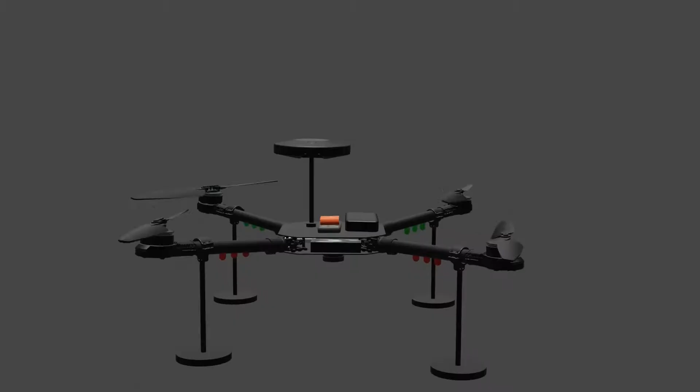The team timeline. A formulated and comprehensive flight plan must be executed meticulously during simulated full mission flights. The system must be modularized and designed to a plug-and-play standard. The team efficiently manages the entire system by utilizing GCS software to upload the waypoint course and search grid into the autopilot via a 915 MHz telemetry link. Once preparations are complete, the mission can be initiated with a simple command to arm and begin.

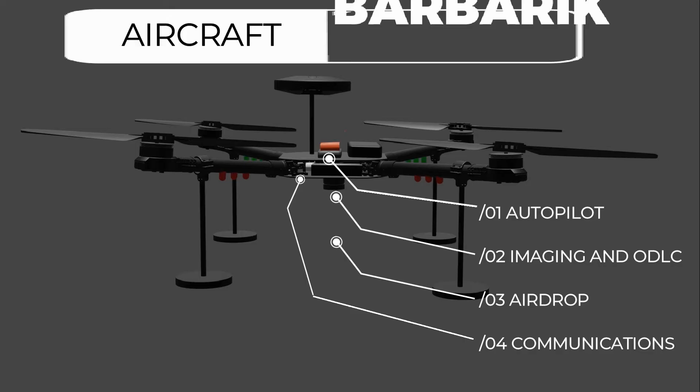Throughout the mission, the UAV autonomously navigates the designated waypoint course, and when it reaches the search grid, the manual UI operator can access the camera images in real time. These images are promptly analyzed, and any targets identified are designated for the payload delivery. Once a target has been identified, the airdrop system is triggered to release the payload, which is safely and accurately delivered to the target location with minimal delay.

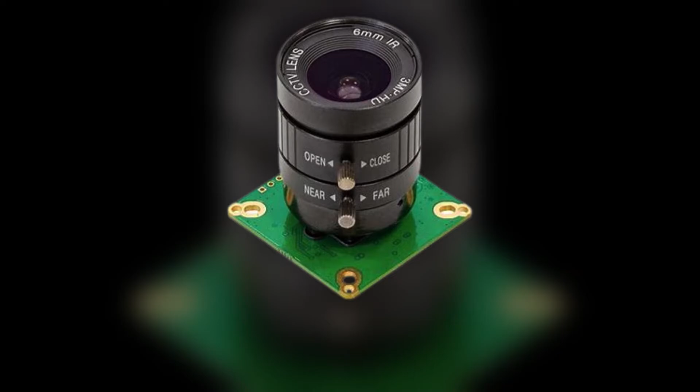This process is repeated for each of the 5 designated targets, after which the UAV returns to its point of origin and lands safely. This year, for imaging, an ArduCam HQ camera featuring a Sony IMX477 sensor is being used, along with a 6mm lens. The combination of these features provides the system with images with target pixel dimensions of 81x58 pixels, which provides sufficient clarity to classify each target and enables effective object detection, localization, and classification.

A manual UI system is developed incorporating the Jetson Nano as the onboard computer and a Ubiquiti Bullet M5 and PowerBeam M5 for reliable data transmission from the drone to the ground control station. The buttons have key bindings to improve usability. When the operator selects an object, they can stop and reposition the drone based on the object's calculated location using pixel coordinates of the target in the image. Accounting for various lighting conditions and backgrounds, ideal values for speed of drone, FPS, exposure, ISO, and shutter speed were chosen.

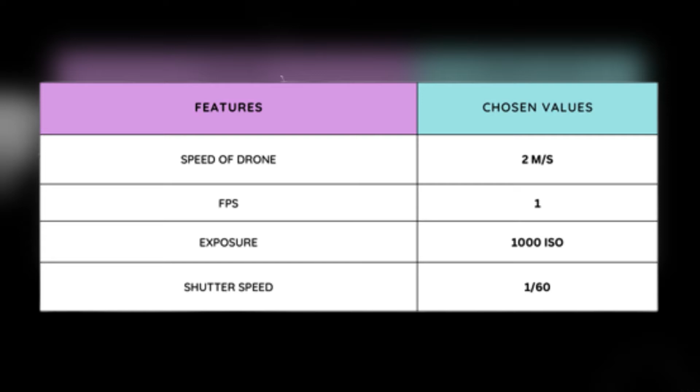The payload, consisting of a water bottle, has been wrapped in a layer of foam to minimize any potential damage. Additionally, the bottle can be easily removed by the judges without the need for any tools. The mechanism operates on a straightforward yet effective stop and release principle. By repeatedly stopping and releasing a free-falling bottle, the mechanism ensures that the bottle maintains a controlled descent and never gains excessive speed before landing. The implementation for the mechanism is done with a pulley which can freely rotate using ball bearings.

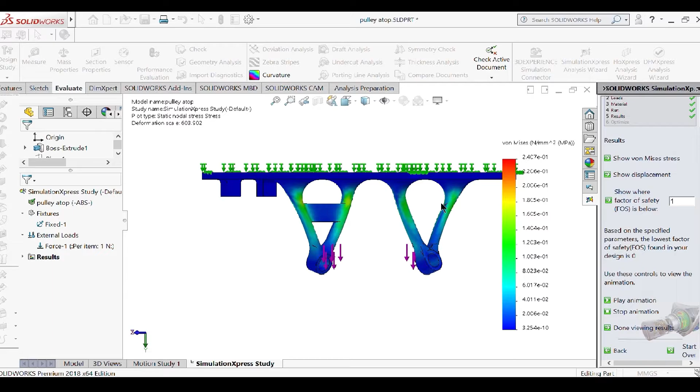The payload housing consists of a plate with two 15-degree tapered extruded cuts that meet at a 60-degree angle. A thick guide for the locking rod is placed on one side of these extrusions. A C++ program is loaded onto an Arduino Nano microcontroller to facilitate the lock-unlock mechanism upon receiving the trigger to drop. Each lock and unlock action is derived from a mathematical function that controls the payload's descent speed. The program enables the payload to drop faster at higher altitudes and gradually slows it down as it approaches the ground without requiring manual intervention.

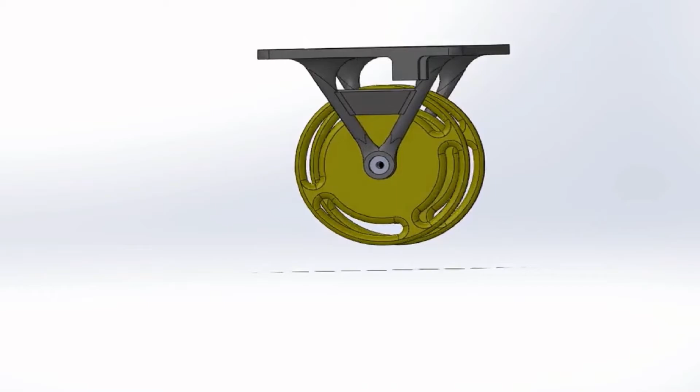The optimal drop time is calculated based on the definition of the mathematical function, which uses delays with millisecond accuracy to choose when to stop and release. After careful consideration of factors such as flight time spent on waiting for drop and safety of the payload, the function has been expertly calibrated to achieve a total drop time of 12 seconds from an altitude of 100 feet.

This level of precision ensures the payload is delivered safely and efficiently. 3 different types of communication systems have been implemented for the communication of the UAS with the GCS. The ground control station is connected to the autopilot via a 915 MHz RFD 900X which sends data using the MAVLink 2 protocol. This provides security encryption and low bandwidth transmission.

Manual control uses a Radiomaster TX16 transmitter with an FrSky X8R receiver which connects to the autopilot through S-Bus. The transmission takes place at 2.4 GHz using the FrSky D16FR protocol. Manual control inputs are sent and the battery voltages are obtained on the transmitter screen for redundancy using the smart port of the receiver.

Ubiquiti PowerBeam and Bullet are used for our communication link for high bandwidth data. These devices act as an Ethernet bridge transmitting data at 5 GHz. It handles imagery data for object detection, localization, and classification, commands to reposition the drone and triggers the drops. Finally, the manual UI operator is connected to the Pixhawk via a serial connection. With the OBC acting as virtual router, there is a TCP connection routed to the operator's laptop.

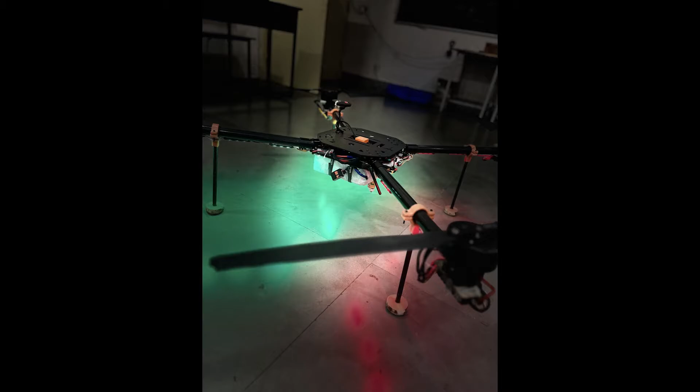The team has designed and built the aircraft, which is tailored specifically for the SUAS competition. The quadcopter is an X configuration with dimensions of 32 x 32 x 20. The frame is constructed entirely of carbon fiber, ensuring optimal durability and strength. The design process involved careful attention to detail, utilizing simulation analysis to precisely route mounting codes.

The frame comprises of 2 plates located at the top and the bottom of the structure, sandwiched by 4 folding mounts for the booms. The motors are attached to specially crafted CNC aluminium mounts situated at the ends of the boom. The propulsion system features top-of-the-line 100 kV motors and a 30-inch propeller system, which gives a maximum thrust of 31 pounds, providing excellent maneuverability and endurance.

To ensure safe and efficient transport of heavy payloads, we have designed a unique landing gear system with non-interference in mind. Specifications of the aircraft are as shown below. Battery capacity 22 ampere-hour, voltage 14S, propeller size 30 inch, ESC 80 amp, motor to motor distance 1170 mm, all-up weight 37.2 pounds.

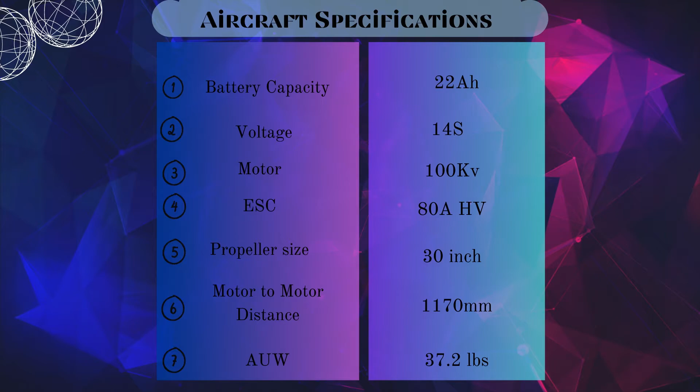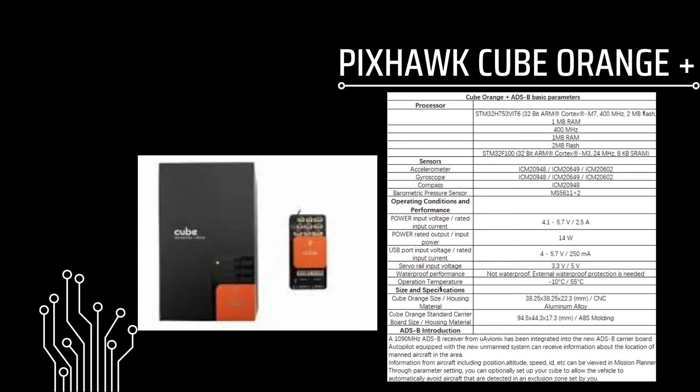The Pixhawk Cube Orange Plus serves as the autopilot for the UAS, featuring advanced capabilities like redundant sensors and multiple communication interfaces for high performance, reliability, and flexibility in UAV applications. ArduCopter, an open-source software suite, is used to control the autopilot.

Tuning is done by applying analytical techniques on flight performance graphs and auto-tuning the flight controller with respect to the frame. This enables easy compliance with competition requirements as the autopilot supports obstacle avoidance algorithms, auto takeoff and landing, and entire waypoint course implementation.

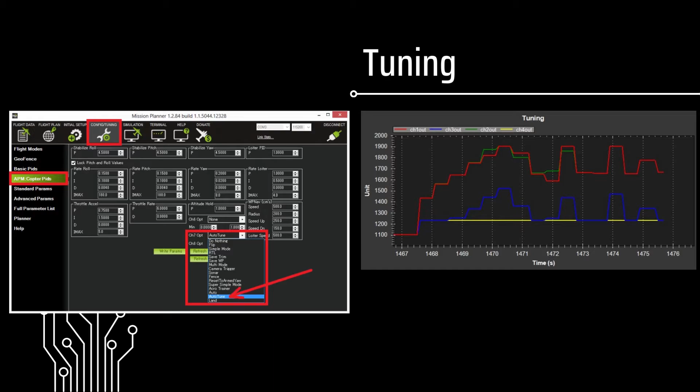As ground control station, the Mission Planner software is a widely respected option that provides professional-grade functionality for mission planning and execution, including advanced flight mission planning, autonomous flight modes, and real-time telemetry and data logging for unmanned aerial vehicles.

Dynamic obstacle avoidance is a crucial aspect of mission planning in order to ensure safe operations and avoid potential collisions with other aircrafts. This is accomplished through the use of unidirectional lidars, which are positioned towards the front and rear of the aircraft to detect obstacles in the flight plan.

To achieve avoidance, the BendyRuler algorithm is utilized on the autopilot system, allowing for dynamic movement away from the detected obstacle while maintaining a safe distance. The BendyRuler algorithm actively scans the surrounding area in various directions in search of open spaces, with the ultimate goal of selecting a direction that is both open and leads towards the final destination.

Under alternatives considered, the table reads as follows: the system, the alternative, and the rationale for discarding. Under aircraft, off-the-shelf frame or commercially available frame was discarded due to lack of design flexibility and higher manufacturing costs. As a power source, lithium-ion battery packs were discarded due to low discharge current rates leading to high voltage sags.

Under airdrop, winch mechanism using brushed low RPM motors was discarded due to its inability to drop within a reasonable amount of time due to mechanically limited maximum speeds. Another airdrop alternative was by using back EMF of brushless DC motor to slow itself down. That was implemented by shorting the cables of the motor with each other. This alternative was also dropped due to inability to make reliable calculations.

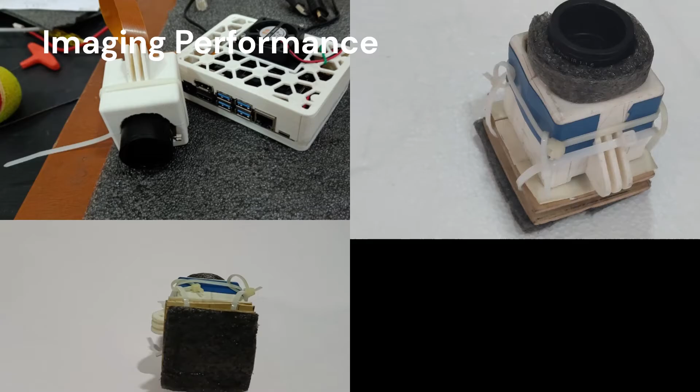A series of tests were conducted to ascertain the reliability of the imagery hardware. Over the past several months, approximately 4,000 images were captured to assess the camera's performance under varying lighting conditions and from different altitudes corresponding to those during the mission. Approximately 2,000 of these images were captured with the hardware mounted on the UAV. Various measures were taken to ensure optimal image quality to prevent undesirable effects such as jello effect and image blur. A vibration dampener mechanism was developed through several rounds of rigorous testing. The average resolution of an object in the images was found to be approximately 80 x 60 pixels, which closely

approximates... The airdrop subsystem underwent rigorous testing to identify potential points of failure, including sudden stops causing jerks and rope winding issues. Several issues that emerged during the testing phase were effectively resolved through minor design modifications, such as the use of tapered supports, proper winding techniques, and the incorporation of ball bearings. Thanks to the fixed position hold capability and rapid descent speeds during the initial stage of the drop, external factors have a minimal impact on the drop accuracy.

Moreover, the mathematical function controlling the drop has been meticulously fine-tuned based on actual drop characteristics observed during the testing phase. Following the optimization of the drop function, a total of 38 drops were conducted, of which 36 were deemed successful. The 90th percentile drop accuracy was recorded at a distance of 4 feet from the target. Confidence with airdrop: 10 by 10, highly confident.

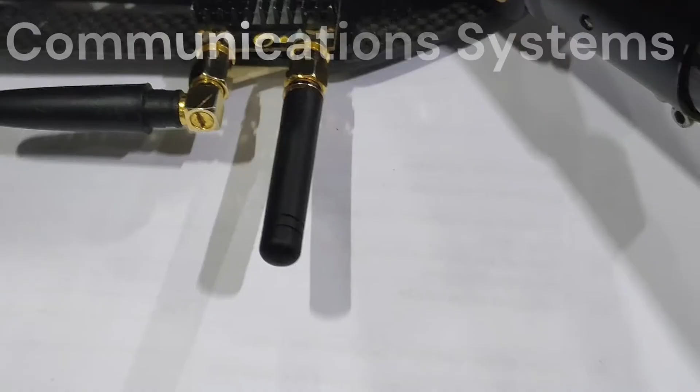The safety of all systems and personnel was of paramount importance during the rigorous testing of the aircraft. The practical rigidity of the aircraft was found to be ideal, with a wing loading that ensures heavy payloads do not adversely impact the frame. The propulsion systems underwent a bench test of 6 hours at full throttle and were determined to be reliable.

To evaluate the performance of the aircraft, initial flights were conducted in stabilized mode, with further tuning carried out to optimize the harmonious interaction between the autopilot and the aircraft. The batteries were subjected to multiple full-cycle discharges to assess their practical endurance, which was found to be 29 minutes at full loaded weight.

Numerous high-speed tests were performed to arrive at the conclusion, as evidenced by the proof of safe flight section, that our aircraft can fly at speeds of up to 22.5 meters per second for up to 12 miles, even in windy conditions during a single flight. Our aircraft boasts an impressive total of 120 documented flights, with approximately 40 hours of total in-flight time.

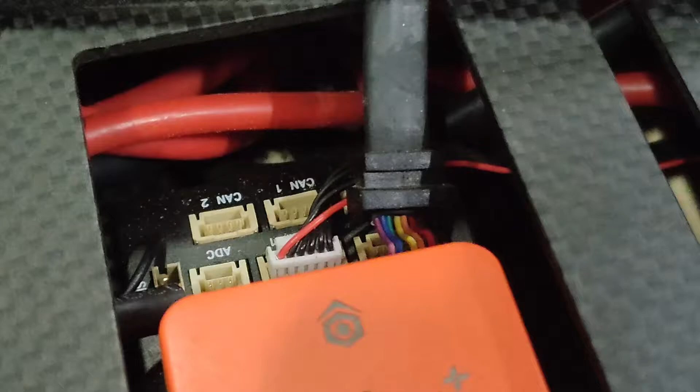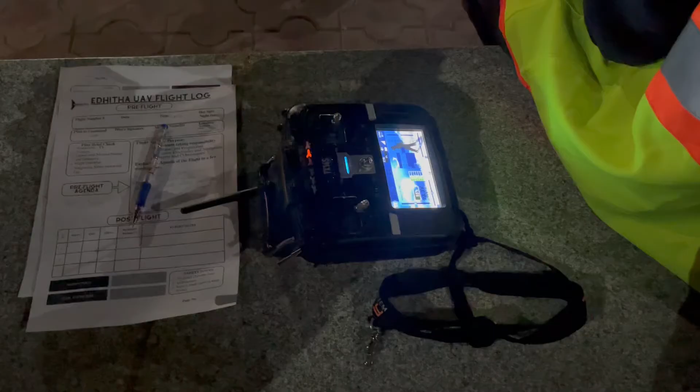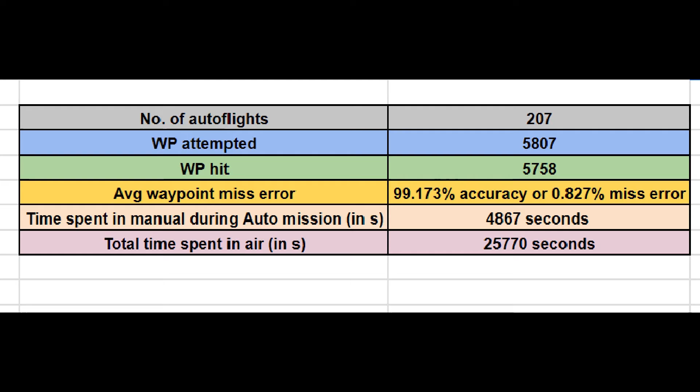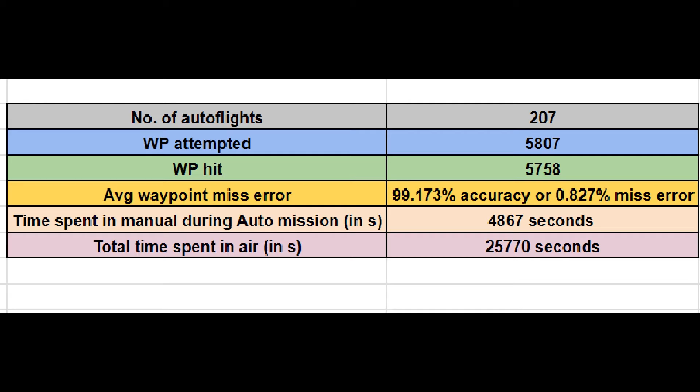After each flight, a detailed log analysis was conducted to assess the desired movement versus observed movement, with special attention paid to factors such as vibrations, EKF variances, and other event failsafes. Number of auto flights conducted, 207. Time spent in manual mode, 4867 seconds. Waypoints attempted, 5807. Waypoints hit, 5758. 99.173% accuracy or 0.827% miss error.

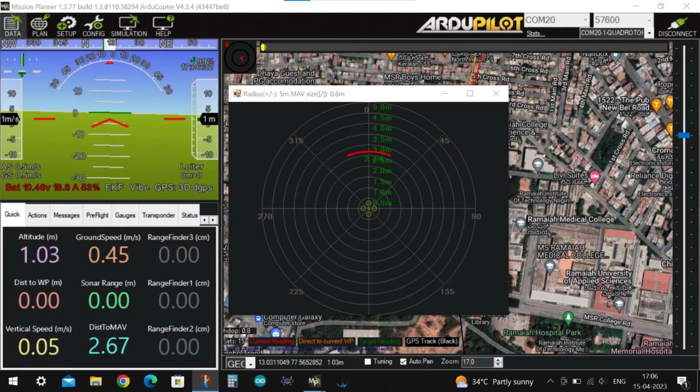During the test performed using Mission Planner, it was possible to view the proximity of the obstacle as well as the distance at which it was detected and avoided. In addition, while conducting the experiments with LiDARs, the following information was gathered.

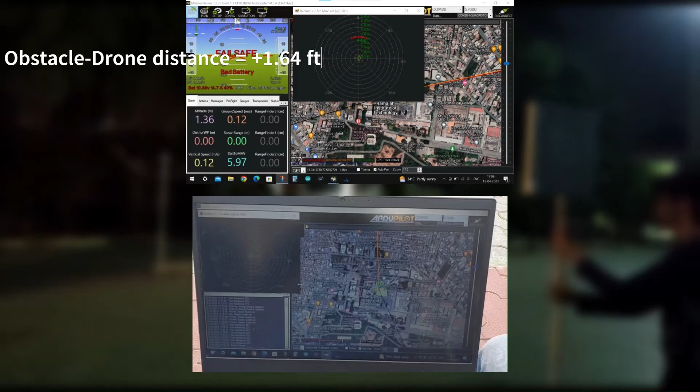During the test performed using Mission Planner, it was possible to view the proximity of the obstacle as well as the distance at which it was detected and avoided. During the experiment, the distance between the obstacle and the drone was systematically increased by 1.64 feet increments. Despite this increase in distance, the drone was able to avoid the obstacle successfully, but only up to 8.20 feet object distance.

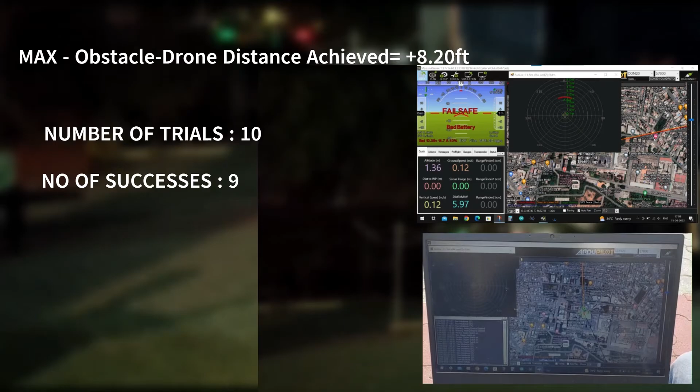Upon completion of the testing, the collected data indicated that LiDAR detected the obstacle consistently every time. Furthermore, the obstacle was successfully avoided in 9 out of 10 attempts, as per our findings. Drawing from our experience at Edhitha, we acknowledge the potential implications of Murphy's Law. To counter this, we prioritize rigorous training of our competition team with our competition systems through full mission testing.

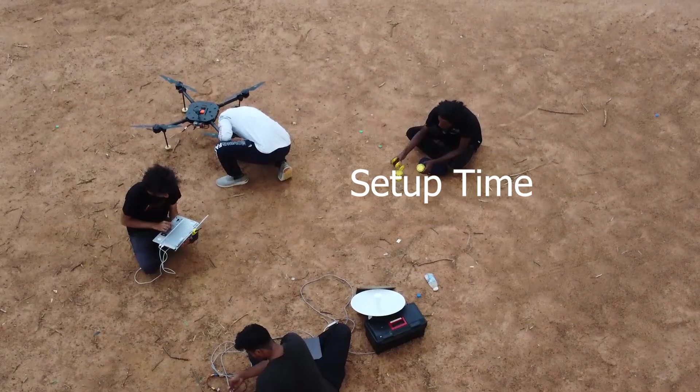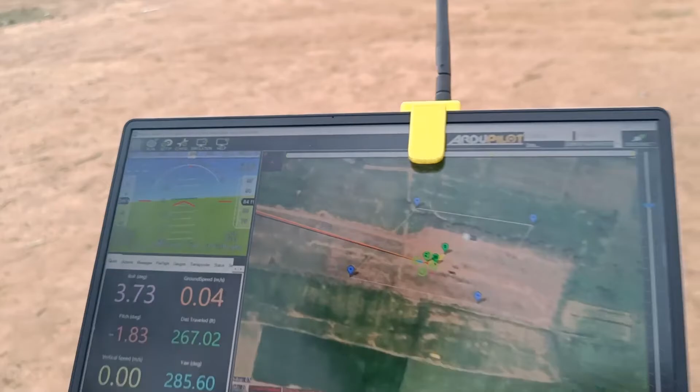Our mission tests involve an exact replica of the evaluation procedure implemented by the competition judges to the best of our abilities. During these tests, our competition team practiced setting up the systems within the allocated setup time, allowing additional time for mission briefings. Once the mission was initiated, it was ensured that only 3 designated operators, as designated in the competition, were responsible for its execution.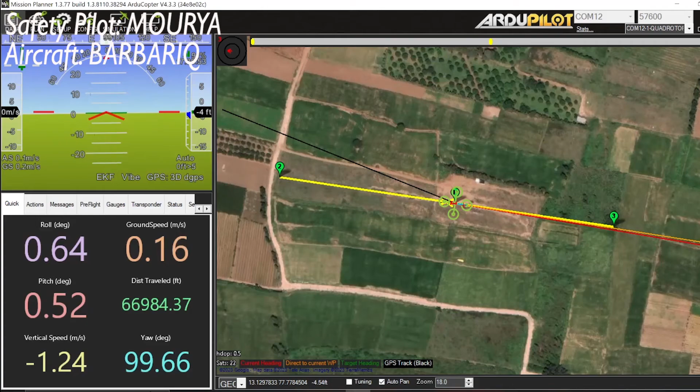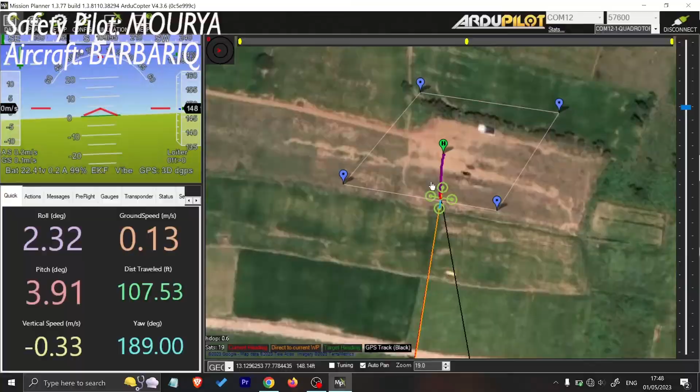In summary, Team Edhitha from Ramaiah Institute of Technology has utilized a systems engineering approach to design our unmanned aerial systems aimed at addressing the problem statement of the competition with high confidence. Our system comprises a proprietary quadcopter design featuring a 30-inch propulsion system with significant emphasis placed on enhancing the autopilot system to achieve maximum autonomy.

The payload release mechanism underwent extensive iterations and redesigns to ensure optimal functionality. Additionally, system integration was a top priority, ensuring seamless performance during the competition. Our team has devoted significant effort to this project over the past year, motivated by our desire to expand our knowledge and skills beyond the confines of our academic curriculum.